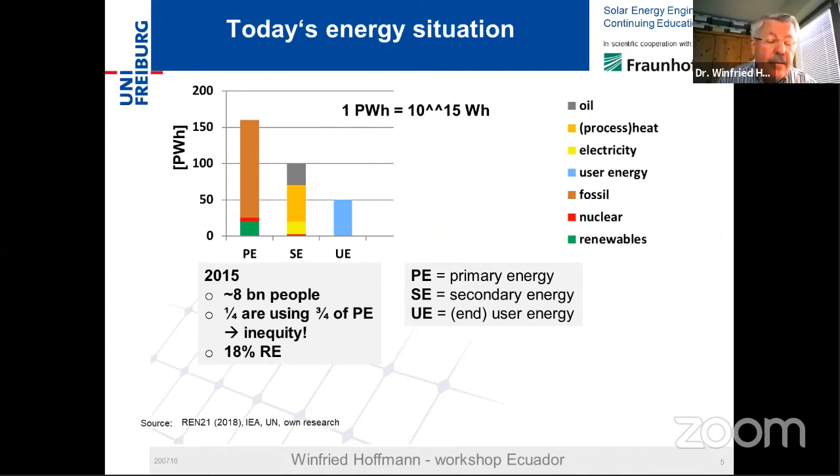In the last 50 years, the CO2 has increased twofold, from about 28 gigatons of CO2 in the 70s up to 52 gigatons of CO2 each year in 2017, and it's still increasing.

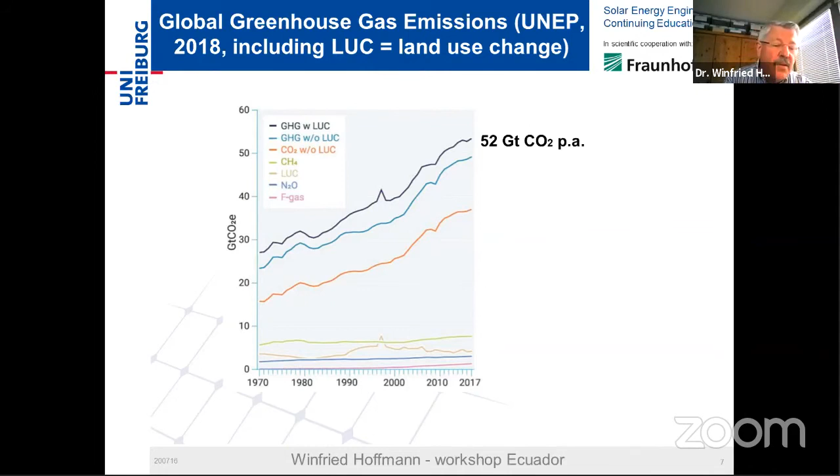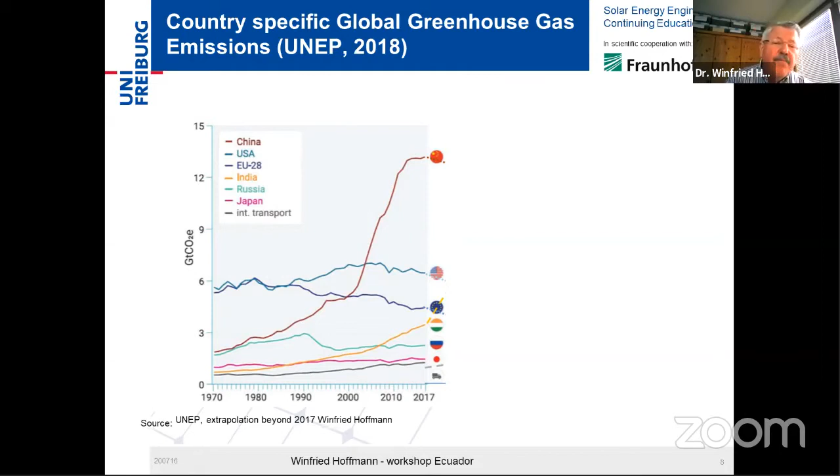Now, where is most of that carbon dioxide produced? This is shown here for the various countries. As you can see, the rising part, that is China - the electrification in China, starting in the mid-90s and quickly ramping up, as you can see. The second is United States, which falls off a little bit, then Europe, and then you see the yellow part. Well, how will it develop further?

So even if the Europe and US part would go to zero, and even if the Chinese would accomplish a very quick growth for renewables, there is still India, there is Africa, and many other places. You can ask yourself, from those 52 gigatons which I just mentioned, that most probably, if you don't do anything, it would further increase, as we have seen in the last 50 years.

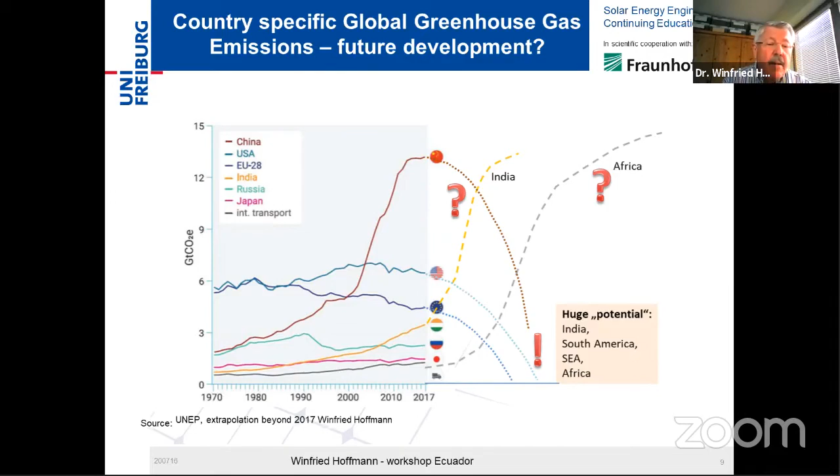Scientists have told us if we would like to have a temperature increase limited to 1.5 degrees centigrade, like in the Paris Agreement, the cumulative CO2 budget is 2,800 gigatons. If you look at when this will happen, that is the late 20s. So that would mean if we would like to stay at 1.5, then from 2029 onwards we have no possibility to add any further CO2. The 52 gigatons must be zero.

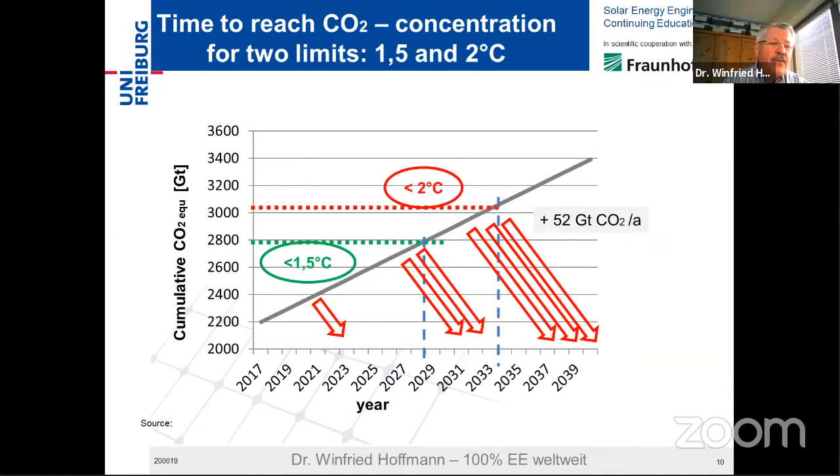If you allow 2 degrees centigrade, then you add a little bit more, but it will only give us a couple of further years to get this down to zero. Otherwise we will really face big problems. So therefore we urgently need an energy transition.

You see on the left-hand side the situation as of today, 2015, and what is needed in 2050, or maybe 2055. Then most probably we will have 10 billion people, and we have to stop inequity, as I was just mentioning. So we are asking that everyone on this globe should have the same energy quality as today's privileged level. We further assume an energy efficiency factor of about 2.5.

Just to give you an idea, if you change a light bulb to LED, then you have an energy efficiency factor of almost 10. If you have an electric car compared to a combustion engine, you have a factor of 3. There are many such examples. So 2.5 is something which is reasonable, but still quite an effort.

And of course, that would give us the possibility to go to 100% renewables. As you see on the upper part, the primary energy is only green, namely renewables. And the good thing is that when you have only renewables, then by definition, primary energy equals secondary energy.

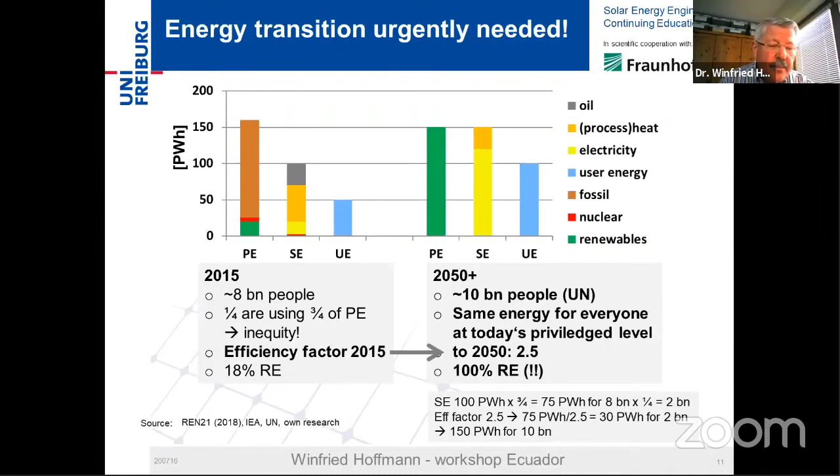Now, what is the energy content of renewables globally? On the left side, you see the technical potential, which is 80,000 petawatt hours. Interestingly, the yellow part is solar, the blue part is wind, and the red part is all other, meaning hydro energy, geothermal, biomass, tidal and wave, and everything.

When you go from the technical potential to the sustainable potential, that already takes into account that you need quite a lot of area for food production and things like that. So that number decreases to about 3,100 petawatt hours. But still, remember, we only need 150 petawatt hours, so we have plenty of sustainable potential. Again, the split is 90% solar, 9% wind, and 1% all other.

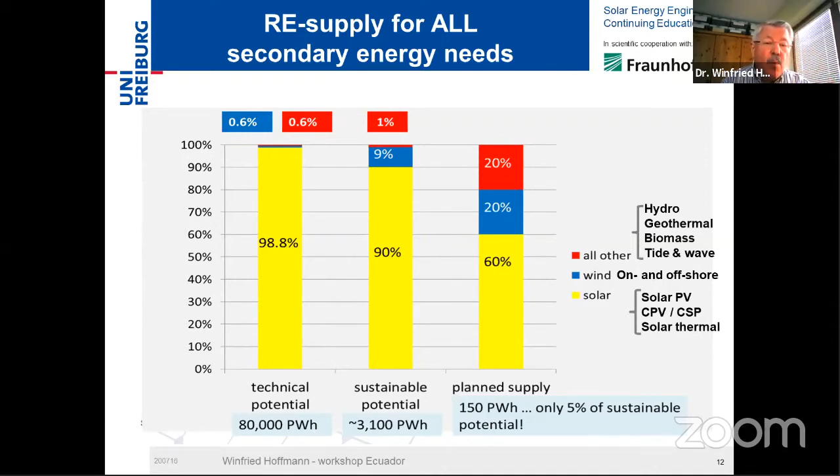In order to allow in the future realistically to take advantage of local good possibilities, our planned supply for the 150 petawatt hours assumes 60% solar, 20% wind, and 20% all other.

Now, why are wind and photovoltaics dominating in the future? First, as I just mentioned, they have sustainable availability. The production of electricity on the same area of land compared to biomass is already today 50 to 100 times more. So therefore, you should never use biomass to produce energy - that should always be done by photovoltaics and wind.

That becomes even more visible when you compare electricity with an electric car versus biodiesel and a combustion engine. On the same area - let's take 10 square meters of photovoltaics - you can drive an electric car 10,000 kilometers in Germany. In southern regions, 10 square meters of photovoltaics lets you drive 20,000 kilometers. If you grow the best biodiesel on the same area of land, you can only drive 100 kilometers. So again, biomass for energy and transportation should be forbidden in the future.

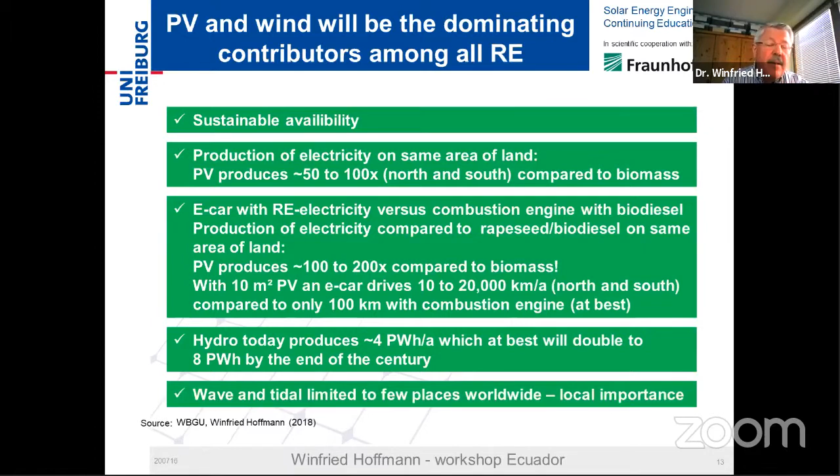Hydro, just to give you an idea, today we have 4 petawatt hours, and at best it will double by the end of the century. Wave and tidal have local importance, but are only available in a few places.

To give you an idea about the economics, there is in Great Britain a brand new nuclear plant, Hinkley Point. The average price at the end of that nuclear power station is more than 20 cents per kilowatt hour. When you would like to produce clean coal and gas, the cost is much higher than 10 cents per kilowatt hour.

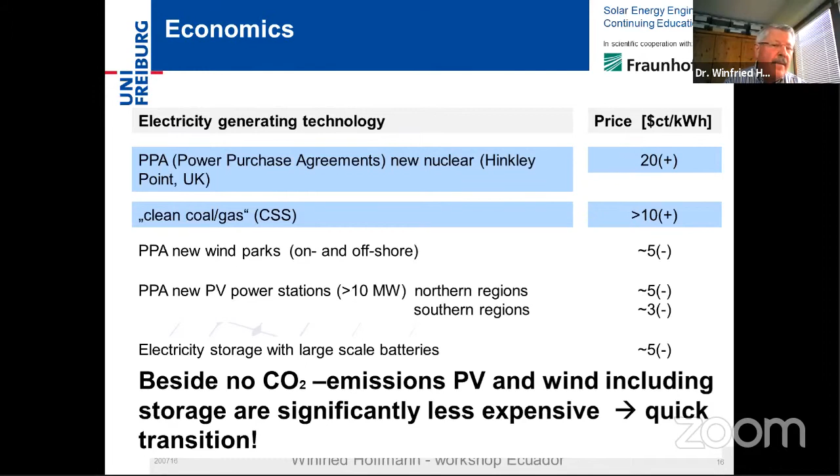For wind and solar, already today you are at 5 cents, and in sunny regions photovoltaic is already below 3 cents per kilowatt hour. Storage with large-scale batteries is approaching 5 cents. So that means photovoltaic and wind, including storage, are significantly less expensive than the traditional ones. That means we have a big transition.

Just to give you an idea about mobility, because that is something people are talking a lot about: you can either have on the left side an electric car, in the middle a fuel cell fueled by hydrogen, and on the right side air transportation and ships.

Now, of course, the oil companies would most like the situation of a green fuel, because then everything could stay the same. And also the car industry would love it because they could still use the combustion engine. However, you will immediately see the three different parts.

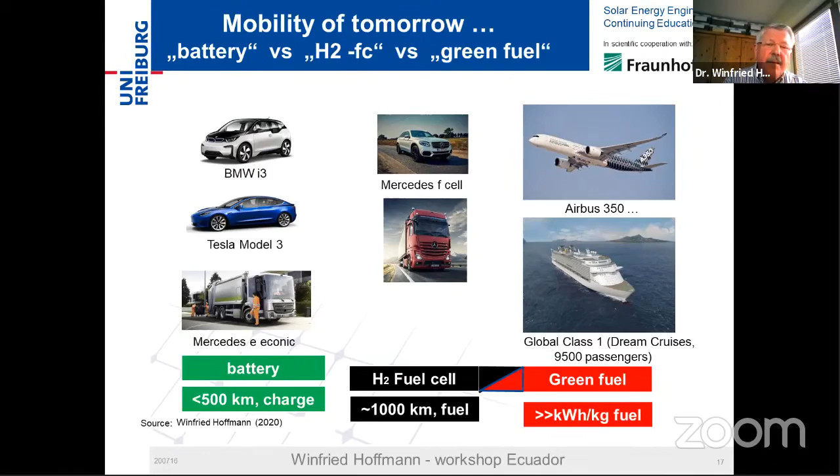On the upper side, if you start with the same 100 kilowatt hours of green electricity, with an electric car you can drive 600 kilometers. If you make electrolysis to produce hydrogen and use the fuel cell and electric motor, you are already almost bisecting the driving distance. And if you go further with the hydrogen to methane and use a combustion engine, even assuming only 5 liters per 100 kilometers, your range for the same 100 kilowatt hours is only 75 kilometers compared to the 600.

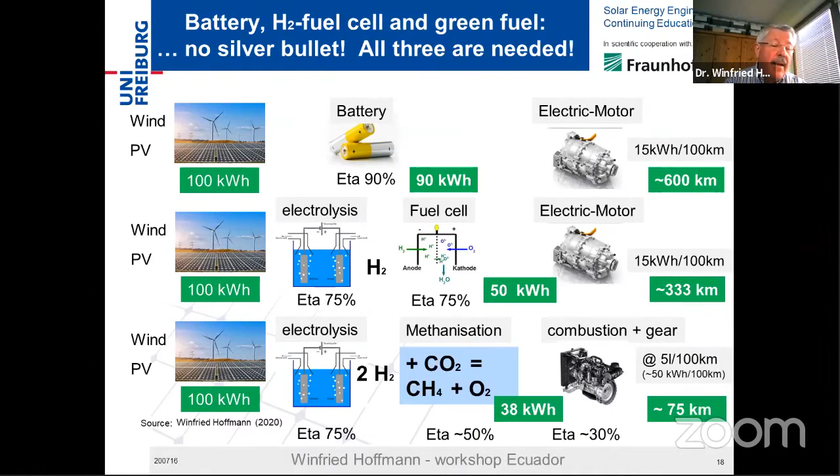That is obviously immediately seen. So the combustion engine as of today costs about $4 per 100 kilometers, assuming 5 liters at 80 cents. The electric car, even including the distribution of renewable electricity, is a factor of almost 4 cheaper. With hydrogen, at half the distance, the cost almost doubles, as you can see.

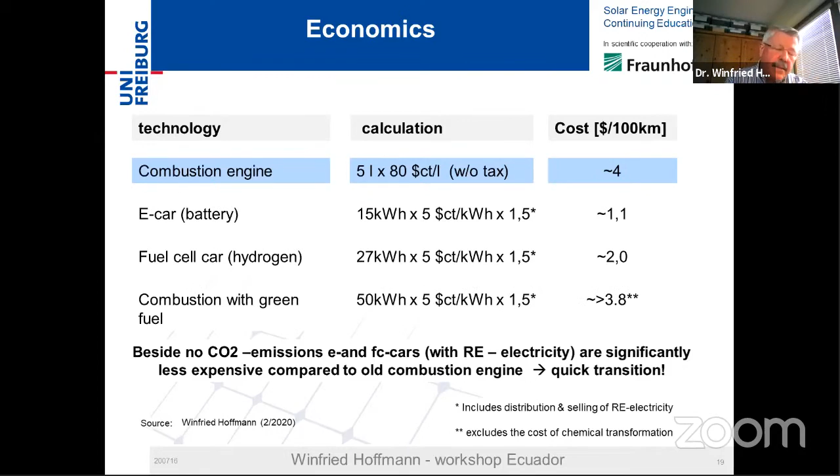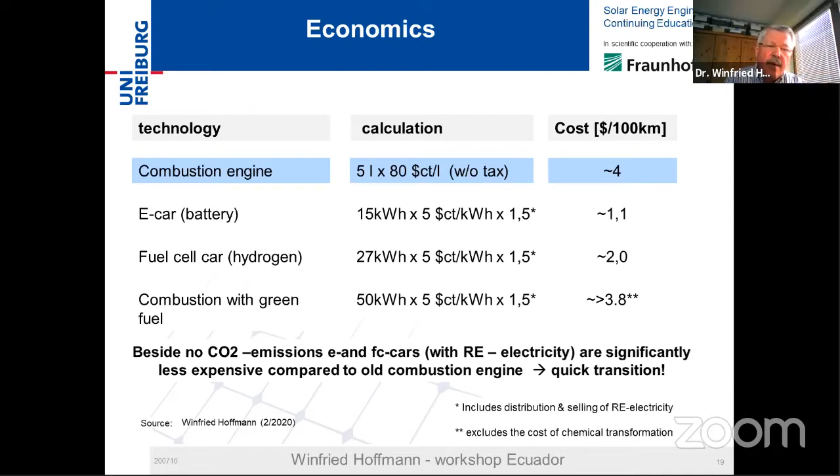Therefore, for all those applications where you could afford it, you would use the cheapest way, and that is the electric car. If you drive it with a green fuel, as just mentioned, the price is very much the same as today. So you will need the green fuel for special applications, like air transportation, but for cars you would most likely use, whenever possible, the battery.

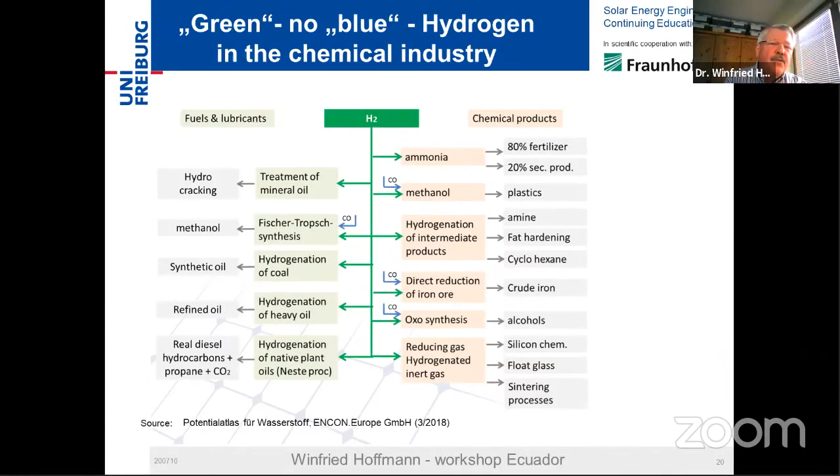The other application is the chemical industry. Here are just some examples of how you could use green hydrogen to be introduced into the chemical industry. I will give you an example here: steel production.

Globally, we are producing 1,800 million tons of steel per year. That is associated with 2,700 million tons of CO2, so 2.7 gigatons. That accounts for 7% of global CO2 emissions, so quite significant.

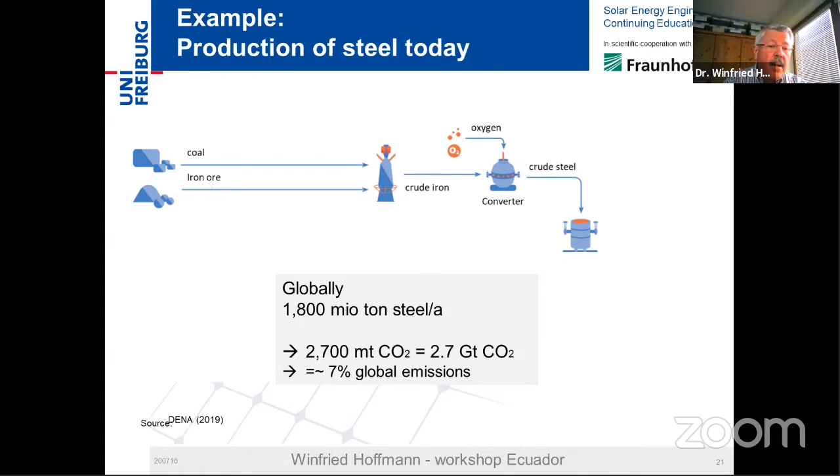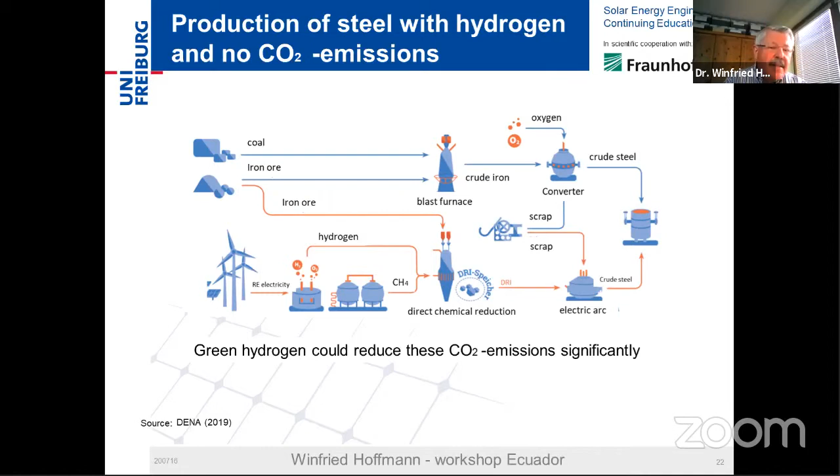Now, if you use hydrogen and also methane produced from hydrogen, and make a direct chemical reduction of your iron ore, then you can dramatically reduce the CO2 emissions. I could give you many more examples of that. This just shows how you are able to dramatically decrease the CO2 concentration which we are emitting today.

So just a little bit about the photovoltaic market. Just take the message here that in the last 10 years, the photovoltaic market grew with more than 20% per year. That gives you an idea what the industry was able to accomplish.

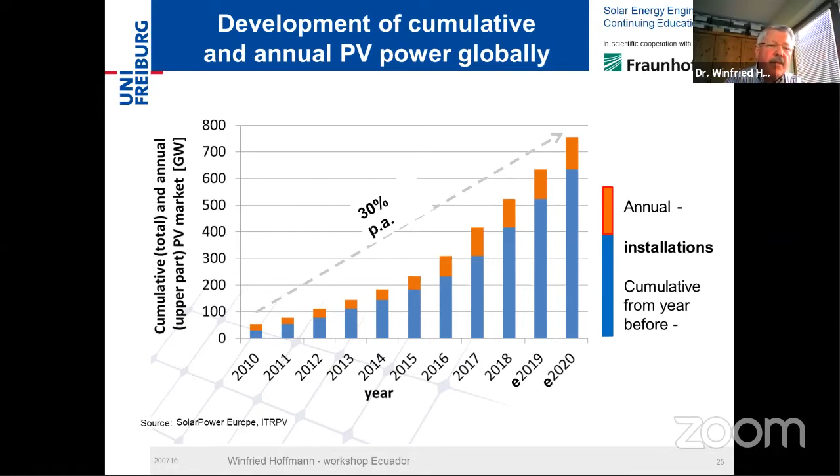And if you take the cumulative installations of photovoltaic, so the red part is the annual addition just shown before, plus then what has already been installed in the years before, this increase of the cumulated number is 30% per year.

And if you would like to go in the future, the next 30, 40 years, from today's volume to, in this case, 1.5 terawatt, then you would end up in the 2060s with a number of 30 petawatt hours of electricity. Remember, we need 150, so 30 is 20%. And by doubling the growth figures here, you can make your own calculations of what is necessary to end up with more.

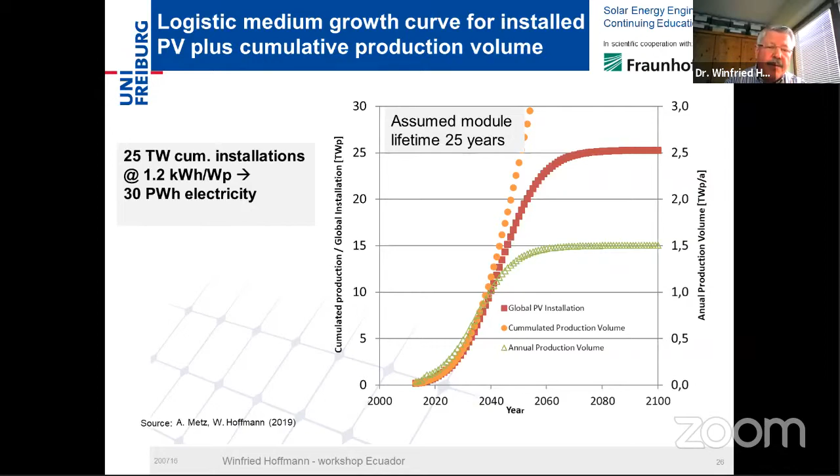For those interested in technology: the simple solar cell produced until the 80s was crystalline silicon with front and back contact, ending up at 10% efficiency. In the years after, we introduced passivation on the front side, so module efficiency increased towards about 18%. Adding passivation on the rear side gives the PERC and PERL structures, with efficiency today approaching 22-23%. Going to heterojunction back-contact cells, you reach the physical limit of a single junction silicon solar cell at about 27%.

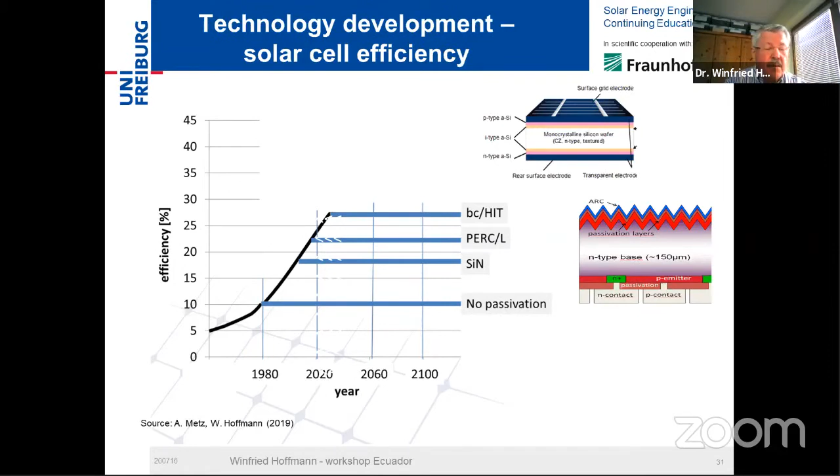Now, would that be the end? Of course not. You can put thin film solar cells on top of the crystalline silicon, already done today in industry and pilot plants. With a two-junction cell, you can increase efficiency towards 32-33%. With a three or even more junction tandem cell, you can go up to 40%. So there is plenty of space for research institutes and industry to further increase efficiency quite significantly in the future.

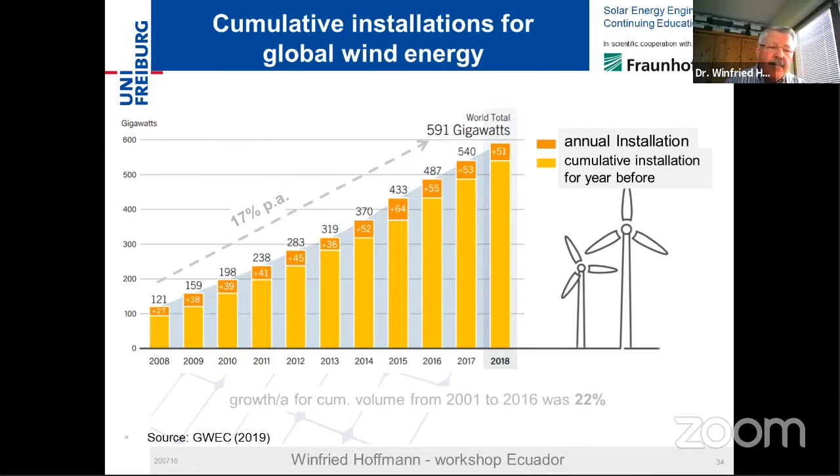Just for wind energy: the cumulative installations for wind are growing about 17% per year. And to give an idea that it's also not the end of what you see today - state of the art machines have about 3-4 megawatts per windmill. Engineers are working seriously on windmills where the height of the Eiffel Tower is reached with the rotors, and these would then have 15 megawatts of power, which gives the possibility to decrease the cost for each produced kilowatt hour.

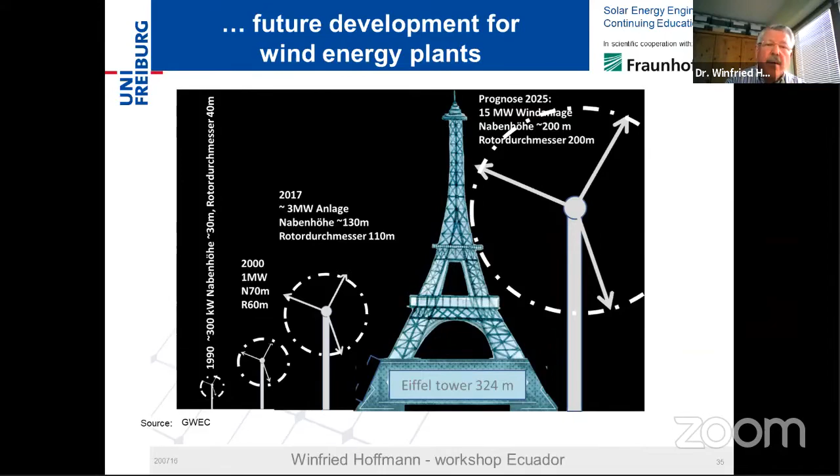Just an important point - if I had told serious energy people 20 years ago that wind and solar will outperform nuclear power worldwide based on energy output, people would have called me really stupid. But that is exactly what is happening right now. This year, photovoltaic and wind together will produce 2.5 petawatt hours, the same as today's total nuclear fleet worldwide is doing. Now that fleet goes down, while PV and wind go up. That is what we definitely will need.

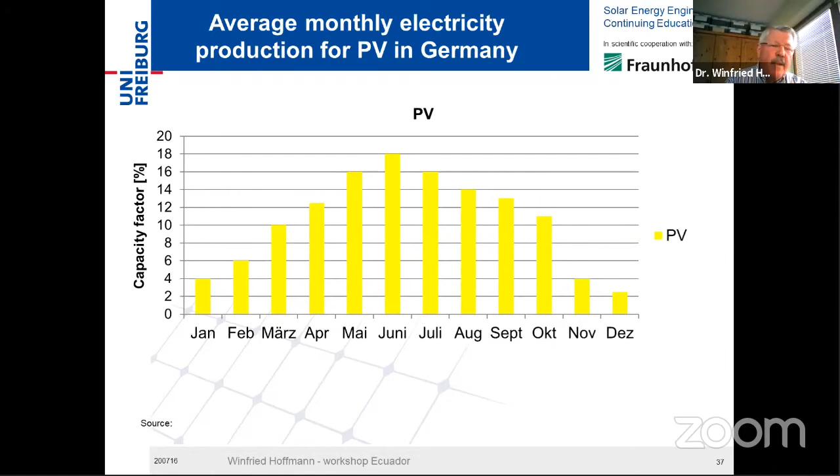This quickly shows the importance of having wind and PV, especially in Germany. In summertime, we have most output of photovoltaic between April and August, and in wintertime, obviously, we have less. Wind is just the opposite - less in summer and more in winter. If you take the sum of the two, you get a nice smoothening of the energy output per month, which is important so you don't need seasonal storage. And of course, in more northern regions you would install more wind compared to PV, while in southern regions you would add more photovoltaic compared to wind. This shows the importance of having photovoltaic and wind in certain areas for power production.

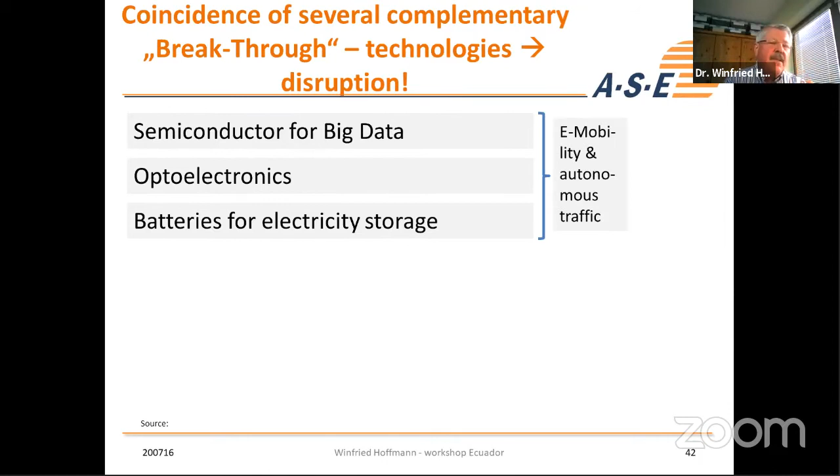We have optoelectronics, and nowadays batteries available for energy. That together gives us the possibility to have electric mobility and also autonomous traffic. We have photovoltaics and wind, which gives us the possibility of producing electricity at much less cost compared to fossil and nuclear.

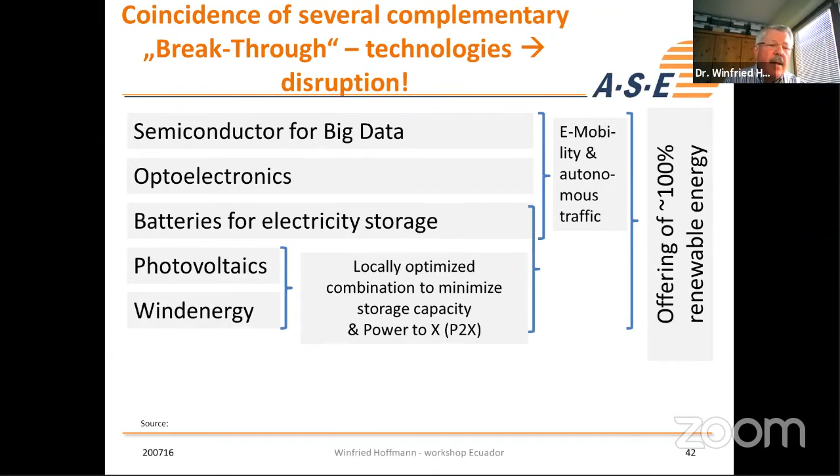And if you take that together, offering 100% renewable energy is really something possible. And that is what I'm convinced will be the reason, when the finance industry has understood that situation, that we will have a really fast penetration of 100% renewable globally, and also solving the inequity, as I was telling you before.